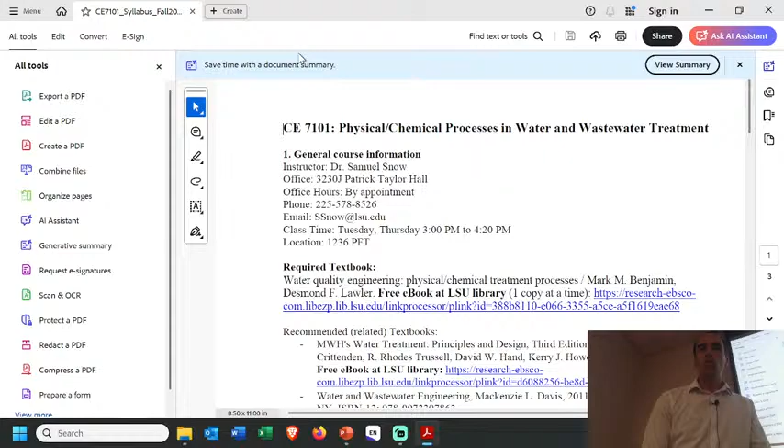So with all of that, it's kind of too much to cover in one semester, I've found. So we're going to focus in, of course, on reactors and reactions, and then, well, let me just go ahead and pull up the syllabus. We'll show you. Since our department also teaches something that focuses a little more on the chemistry side of things, I'm going to gear this one a little more towards the physical processes.

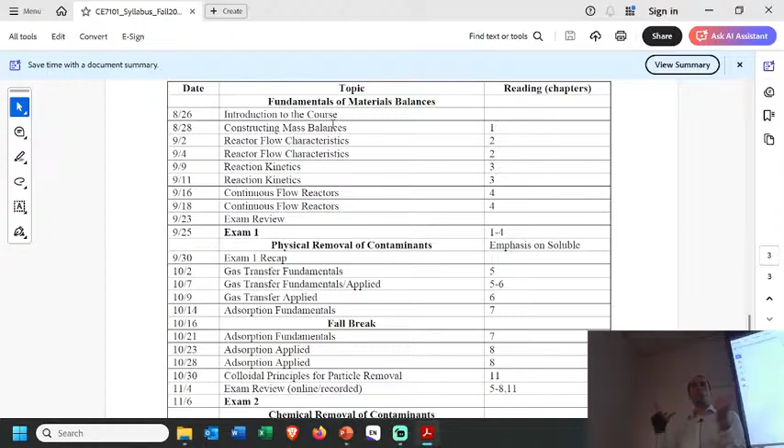Things like adsorption. So you'll see our plan kind of is to go through reactions, reactors, and that'll be our first segment: understanding almost the container that we accomplish some transformation in, and that transformation process itself in terms of how quickly things happen. That's going to be the focus of the first unit of our course.

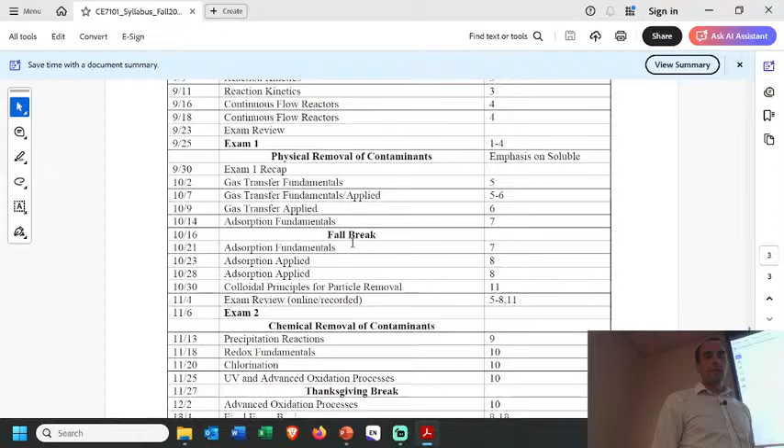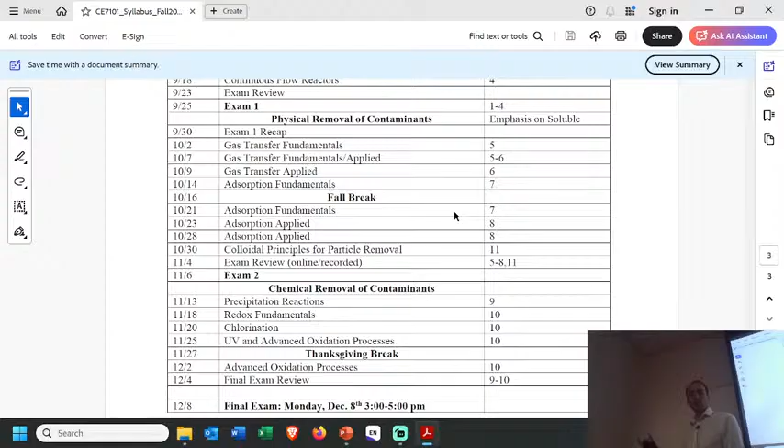From there, we'll talk a little bit about gas transfer, some fundamentals there, and adsorption. Turns out those two are fairly similar concepts in terms of adsorption models often being used for gas phase type of stuff, but adsorption is also used in the liquid phase, and we'll get into a little bit of colloidal principles in terms of colloids adsorbing and surface chemistry with that. The last segment then will be on more chemical transformation, chemical removal type of things.

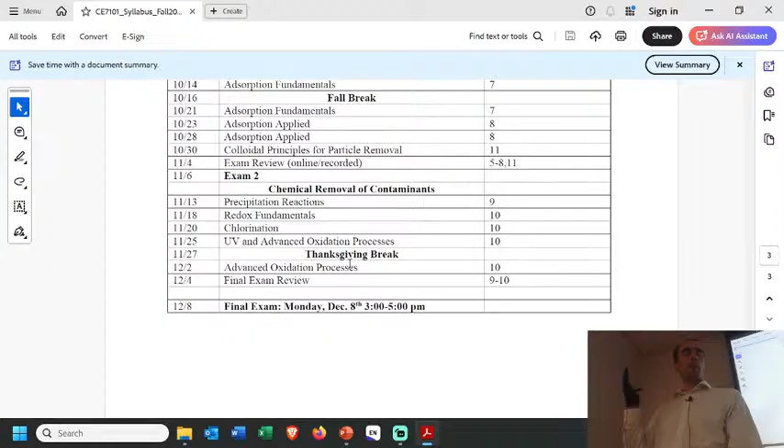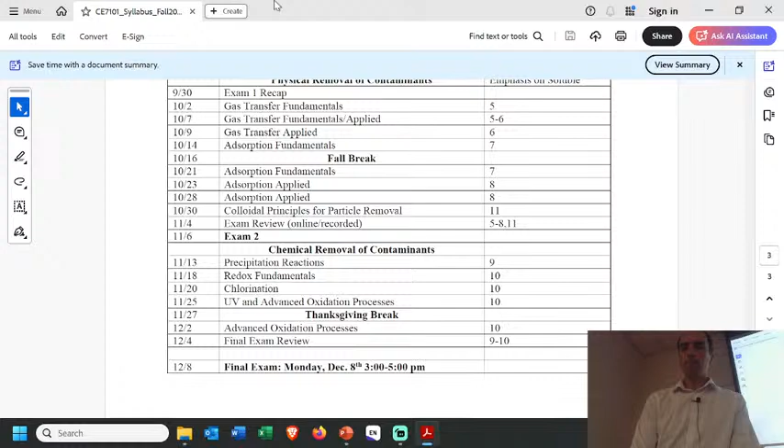So this is my plan right now. If you give me some feedback on the early side, I could shift this. So if somebody really wanted to learn something in particular and felt like you'd really love to have a course on something, you're welcome to speak up, and I'll see what I can do to adapt. So if we take a look back at the slide I had, of course, we're going to do some reactors and reactions.

That puts us in the context of what we're doing. If we say this is a second order reaction, what does that mean? What implications does that have? And what might be the best reactor to put that in, right? There's a lot of things we can consider with that.

So then we're going to take kind of a physical approach to the dissolved, and a chemical approach as well to the dissolved. We're not really going to touch on membrane processes too much. I do have a few lectures on that I could share with you if you're interested.

In the past, we had a 4,000 level special topics course on membranes, and we just hired Dr. Se-Woon Kim, who's also a membrane specialist. So he will probably teach that or something similar pretty soon. So if you did really feel like you needed some membrane stuff, you can let me know. But there's probably going to be some good opportunities for courses dedicated to that. So it's probably not going to touch on that too much, but I'm sure I'll mention it.

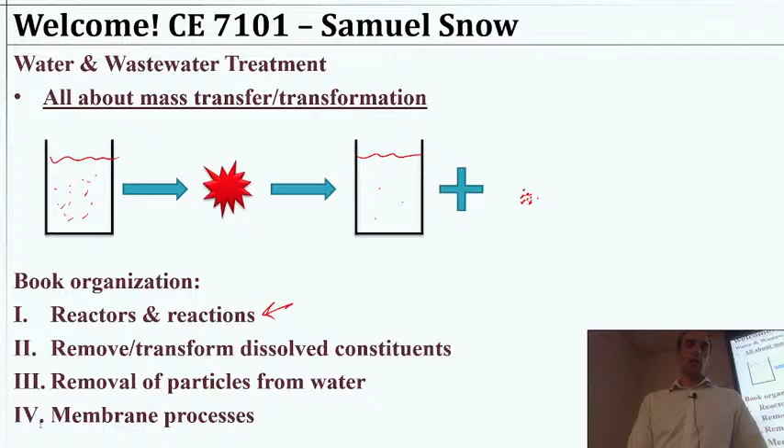I am recommending that you get it, but I'm flexible in terms of, let's see, I'm trying to remember. Can't remember if I've assigned specific problems. I think you probably need it, for I'll give you a problem to say, hey, go solve this problem. So I am asking that you get it. If you're doing anything with water treatment, you're going to be glad to have it, physical or chemical processes. It is a thick book, and I believe there's an online version.

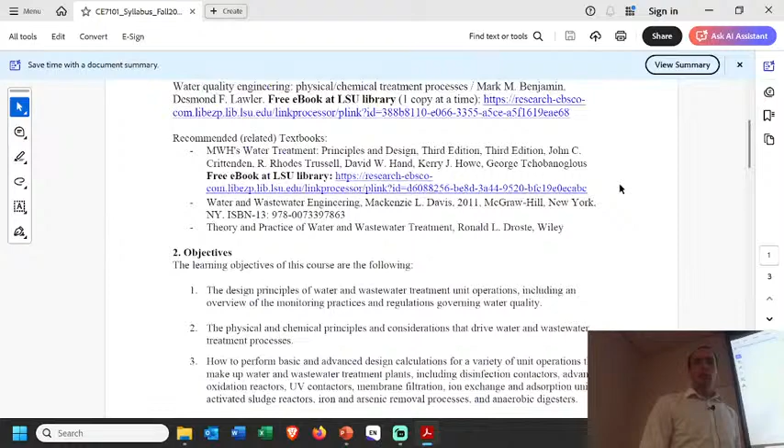In fact, I think if we go back to the syllabus, I think you could even check out one copy at a time maybe, but you can check out the book from the LSU library. So it might make me log in, but if you use this link when you're on LSU's campus, I believe you can get the full text like that. So hopefully it's not a big deal. You might want a physical copy.

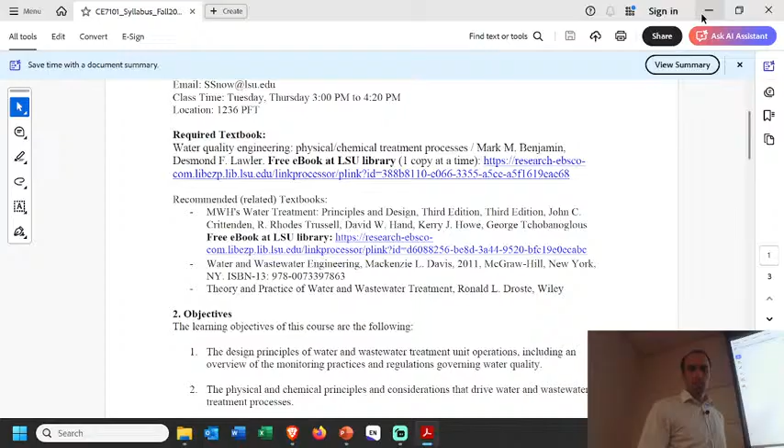So take a look here and figure it out with the library. I don't recall exactly all this, but that at least gives you the information of what book it is and where you can find it. Okay. There are a few other books that you might take a look at.

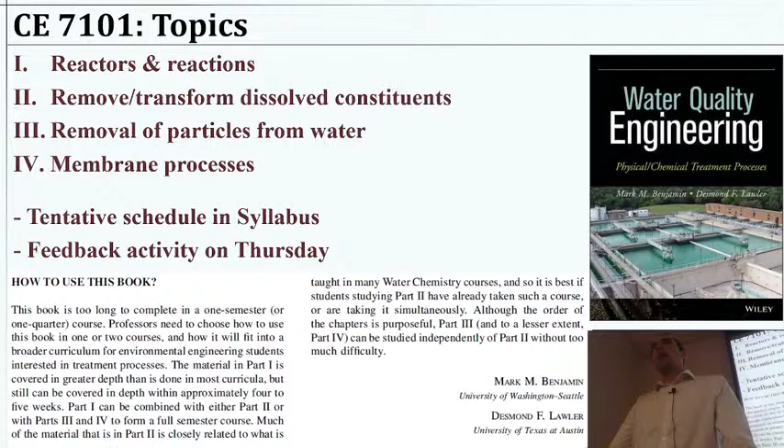Okay, so we have that tentative schedule. I'm probably going to design some sort of a feedback activity for our next class Thursday to kind of get an impression of how you're feeling about the different topics. I didn't prepare that for today, just was keeping it pretty simple, but that'll be something where you can kind of write a few notes like, hey, I'm really uncomfortable with this, would really like to see that, that kind of thing.

All right. The overall structure, assignments and things: my plan is to have two midterm exams and one final. That kind of splits up the course material a bit, with a homework assignment associated with each, kind of on that particular topic. I've also decided to cut the reviews down to just one.

So what I'm going to have you do during the semester, as one other assignment, is to write what I'll call a critical review. And the assignment will essentially be to find a paper, a peer-reviewed journal article, and critique it. This will be a little bit like a journal club activity, but it'll be your own perspective on what's good and bad for this article. Did they really support their claims with the evidence?

So it might be a good idea to find a bad paper, easy to critique, right? But what I'm looking for is for you to use your own study to see, okay, are they just repeating somebody else's work? Did they do something new? Is that new thing actually important, or are they overhyping it? Give a critical eye to it.

Maybe you find a really great paper and it shows because a lot of people are citing it and you can't find anything at all wrong with it. But what you could do is talk about, well, nobody else did this first, and so that's why it's making a big impact. So this will be an assignment to really give a critical review, and we'll talk more about that. I have kind of a rubric for you for that.

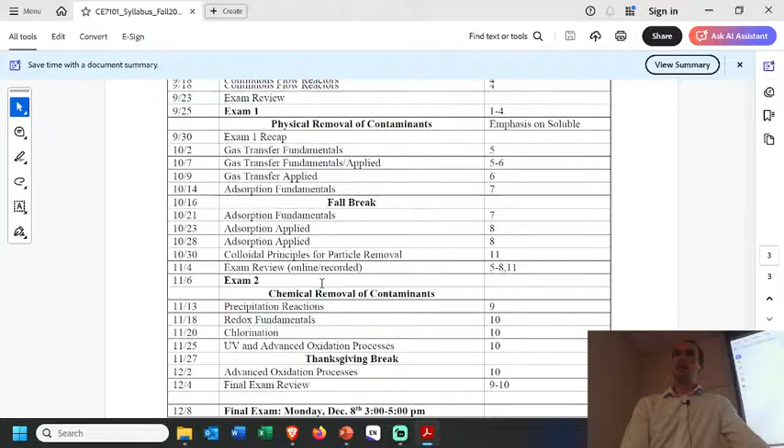Okay. So I think that about covers the syllabus. Any questions on that? Anything you guys feel like you want to see or are scared of? Or I'll get more feedback from you on Thursday. I'll make you write a little bit. What is the exam like? Very hard. No. It should look something like the homework, but scaled.

So the homeworks from this book, by the way, are pretty intense. So sometimes if I don't scale them back well, you probably need the book, and it'll probably go well beyond the course. And I'm going to try to bring the exams back towards more from the course, but that means we're going to be applying what we learned, let's say a mass balance, perhaps to a new mass balance you haven't seen, right? So it will be a little more directly related to the course.

For example, in a homework maybe we'll talk about a particular equation for a tracer test that we just glossed over, mentioned in class, but didn't solve anything with. If we only just mentioned it and it's on one slide somewhere, I didn't even spend more than 30 seconds on it, that's the kind of thing I'm going to aim to not include on the exam, where knowing something important about that is the crux of a problem.

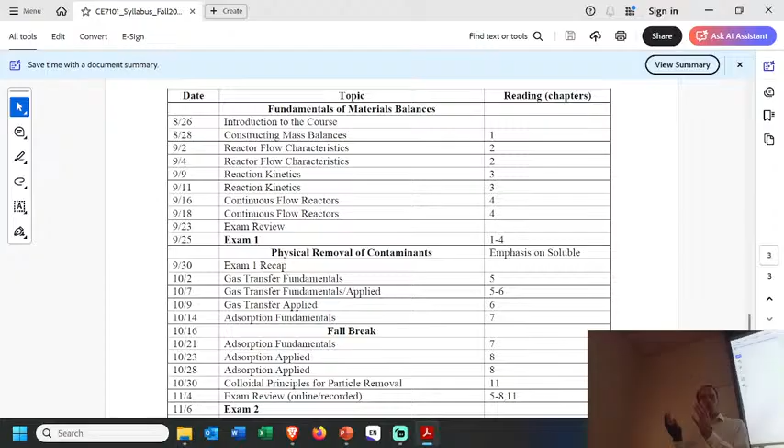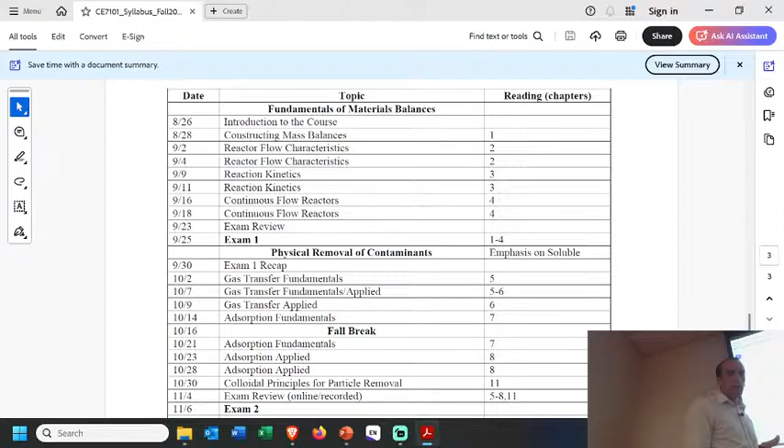Now, there might be cases where I say, okay, well, you could apply this to something else that we only mentioned, but you already have the knowledge for it, right? So you can apply the fundamentals to this other situation. That would be fair game, whereas expecting you to know the fundamentals of some other concept that we didn't really cover wouldn't be. So I'm going to aim to scope it so that it will be a little bit challenging, but certainly manageable based on what you learned from the course.

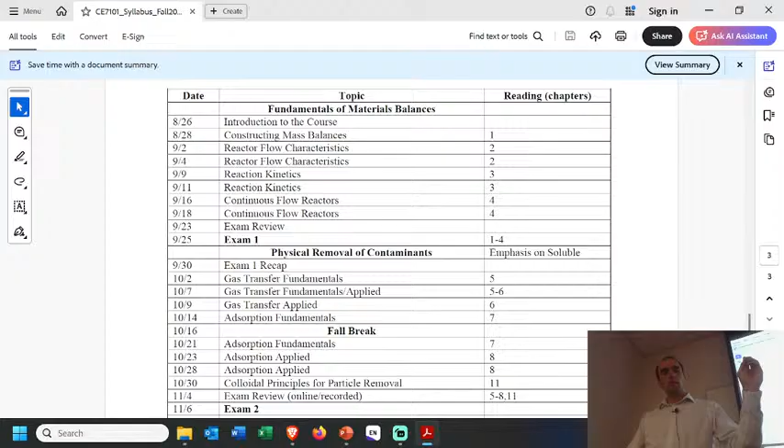That would mean typically maybe a few questions that are a little more topical, maybe true, false, or multiple choice, and then a few where you're solving problems or writing a statement on, okay, how does this work? So I'll better prepare you. I'll use the homeworks as a time to touch base with you to say, okay, what are we still missing? Go through the homework solutions with you as a kind of exam prep. Sound good?

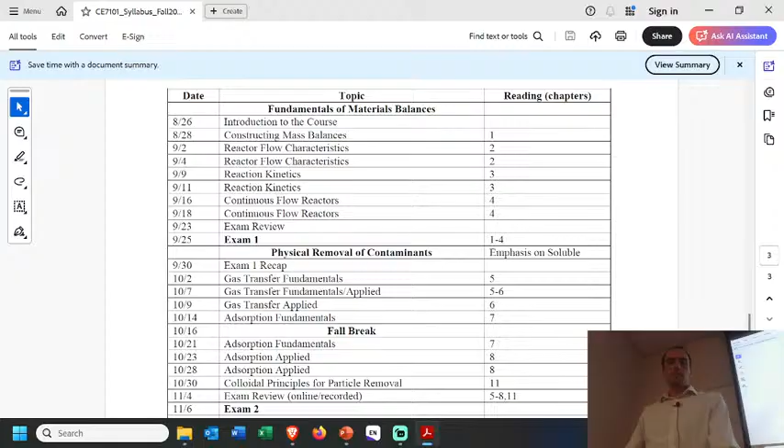All right. Okay, so water treatment. We want to talk about both water and wastewater treatment. And as we do so, the criteria for what we're trying to accomplish depends on the context. For drinking water, of course, there are different standards than for wastewater, right? We could discharge wastewater in a manner where there's not really going to be any human exposure to it anywhere nearby, and maybe it's okay to have some pathogens in it. Maybe we try to reduce it by a certain amount, but we are okay with a certain amount of pathogens.

Now, if I were to ask you, do you think there are any pathogens in here? What would you say? Yeah. Okay, we got a yeah. Anybody? And let's assume, this is a false assumption, but let's assume I cleaned it very well this morning and then filled it up from the water fountain and haven't drank out of it yet. Everything is everywhere. Okay, we got some everything is everywhere. Anybody have more faith in our water treatment? What if this was an unopened water bottle, fresh from Dasani or whatever? Still? Anybody else? Okay, our microbiologists are cutting to the chase here a little bit. Very likely, there are some pathogens in here.

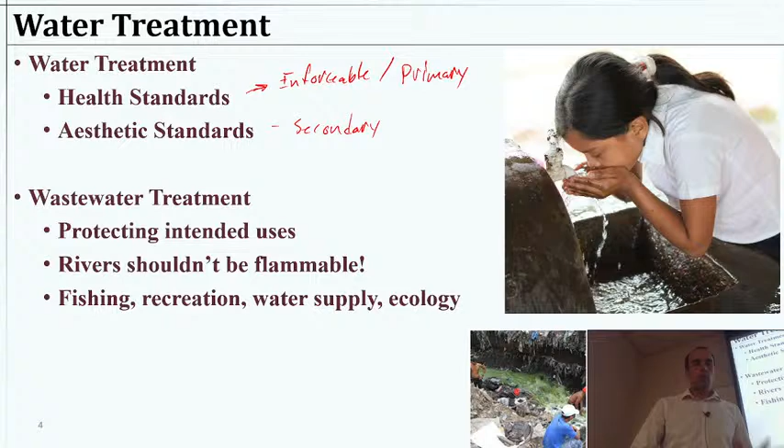It might also be a physical process, or maybe we could use a chemical process. I mean, you could burn the oil, that's a chemical process. So we could do oxidation events that way. But at any rate, where we land in terms of what we're interested in kind of defines what kind of treatment we need. In light of that, we also want to think about, in general, the water cycle.

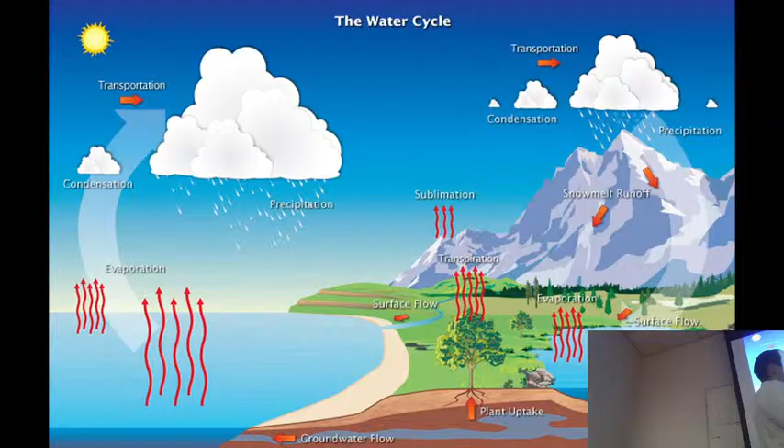It's an important component here just to think about, okay, what water source are we treating or are we discharging to? And how clean do we need to make our discharge or our intake, right, before we are drinking it? So all of that plays into what we're dealing with. This is an example from a long time ago. I think I didn't grab the high resolution version of the picture when I copied this over. But this is a water storage tank in Nicaragua from one of my first trips there a long time ago.

And people had this nice piped water, but they would store it in these bins, and then it's open to the environment, and you can see leaves and things, and we've tested things like that, and it gets pretty dirty. Who knows what animals might be using that to bathe in or to drink from in the middle of the night. So it gets recontaminated, but was otherwise fairly clean drinking water from a groundwater source. So maybe it wouldn't be hard to treat that again, but ideally we'd avoid that altogether.

So this is the kind of stuff, those two are just kind of painting that picture of how do we treat the water, what are we treating it for, and how are we protecting it along the way. All right, so when we think about the human side of the water cycle, we can look at this little figure from a more introductory textbook, and we can look at where we touch it and where we get it from. So we tend to take water for drinking from one of three places.

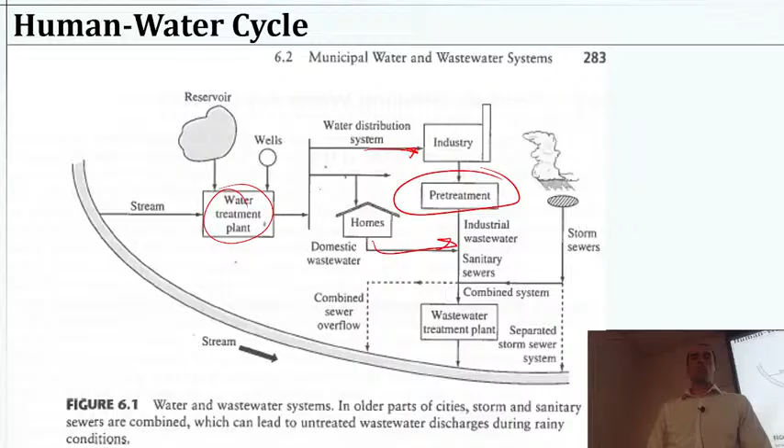Okay. At any rate, then we discharge, and depending on where we discharge it, again, that might be a factor in terms of how clean we need to make it, right? Are we on the space station? Maybe we are in a desert and want to repurpose it as much as we can. Maybe we've got the Mississippi River and we don't even need to dechlorinate because the Mississippi River doesn't care. And that's just the way it is. So all that depends.

Okay, one thing to highlight water and wastewater treatment: if we take a look at the rate of typhoid fever and the death rate from it, I think this is in the US. According to the CDC, we used to have 20 plus deaths per 100,000 people every year from typhoid fever, and we began chlorinating our drinking water sometime around 1910. So this correlates really well with that. This is not strictly the only thing, but our wastewater treatment was also improving.

Our health systems, healthcare in general, was also improving. So the combination of all these things certainly brought typhoid to basically no deaths anymore. Now, the reason I'm highlighting this is because you probably have heard of typhoid fever, but it is a waterborne disease largely. It is food or waterborne.

It is a fecal-oral route of transmission, meaning if you get typhoid, you've ingested something's excrement that had typhoid bacteria, right? So Salmonella typhi, right? So all this to say, this is a great protective mechanism to have appropriate water and wastewater treatment.

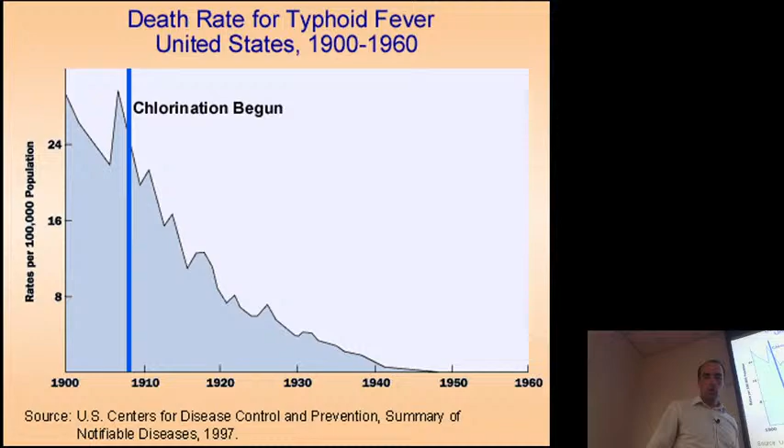Okay, I mentioned hardness earlier. So again, just sticking with kind of the big picture, why we care about this stuff in the class. If you take a look at this map, what we're looking at is how hard is the water, how much mineral content. This is largely going to be calcium and magnesium ions. So depending on where you visited, where you grew up, and a lot of you may be from some other countries, some other places, it varies, right? The geology itself, the mineral content in the ground, that's going to be what dictates the hardness of your water.

So I grew up in this area over here, a little north of Atlanta, and now I'm experiencing water here. I've also lived briefly up here in Michigan, and you can kind of see, all right, there's some big differences there. When I was in Michigan, it was definitely harder water. And certain places in Louisiana, we do end up with hard water, but a lot of it's rather soft.

So any of you ever notice this? You know what I'm talking about when I say the soap acts differently? Any of you have no clue, never experienced?

Some of you just ready for the day to be done?

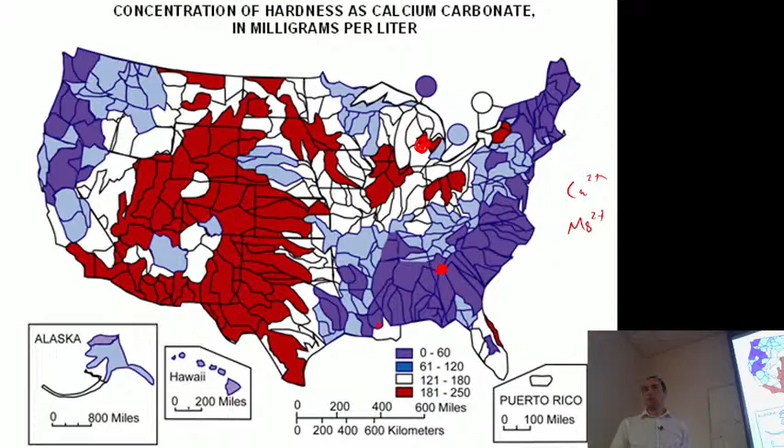Okay, so you might notice it as we go. We spend a fair bit of the time. I taught last year a course with the chemistry side of stuff. So if you're interested in softening and some of that, we'll probably talk a little bit about it in this course, but I have other materials if you are specifically interested. But again, just to show where we're getting our water can tell us how we need to treat it. Our class itself is going to focus on, okay, given some situation, how do we treat it? What do we need? But a lot of these things, it'll depend on the inputs that we have.

Okay, so last thing I want to kind of touch on is a big picture look at a typical drinking water treatment plant. And I'm doing this so that we can kind of get a sense for the different processes we'll be taking a look at. And we'll find specifically the physical and chemical processes in many of these in the drinking water treatment. A lot of these could be used in wastewater as well, like we will do sedimentation. We'll typically call that the clarifier, but it's physically pretty much the same process.

So in a typical surface water treatment plant, again, this will be different if we have a groundwater system, we would have some very, very basic physical barriers to remove any basketballs floating in the water, any fish that might try to swim in, whatever, so like a bar rack screen type of thing. Then we would probably also have what we might call a grit chamber, get rid of any sand and heavy but small particles that could really damage the pumps and things within the system, something that can be removed rather rapidly. Then send us into primary sedimentation.

Now that's going to allow any large particles that were still suspended but could easily fall out of solution to do so, right? That will let some things be removed, and we're going to take that into some sludge processing. There's a good chance this will go into some kind of dewatering, producing some wastewater, and some solids that we could landfill, something like that. So that would be primary sedimentation. And we do that because we want to use gravity. It's very convenient, very cheap. We just need some space to let it settle.

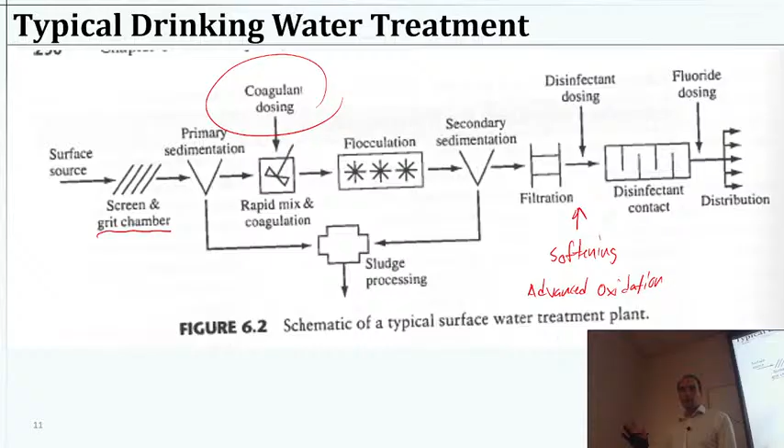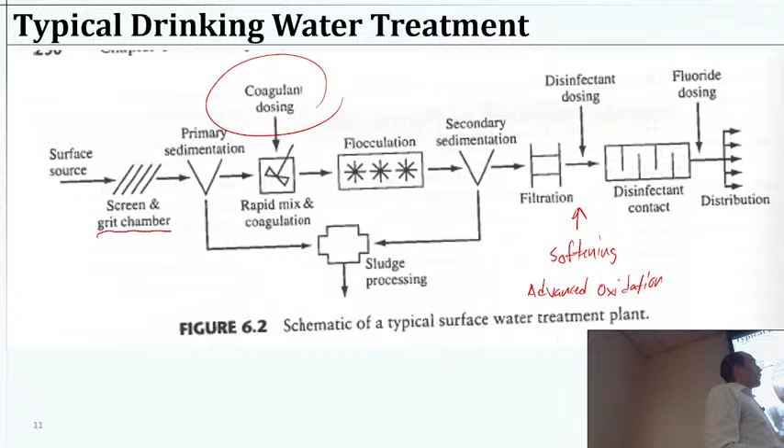Okay, so that's kind of the scheme. From there, we would go into distribution systems, and we generally manage that as if it were a part of the treatment process. So that would be typical for a drinking water treatment plant. And we might, okay, I do have the wastewater. So you see there's lots of physical processes there.

For a wastewater treatment plant, this would be a typical municipal plant with primary and secondary treatment. We do have some biology happening. Again, we're not really focusing on that in this course, but one thing that would be relevant that we probably will talk about is how are we doing the aeration there? How are we adding bubbles in a way where it's going to oxygenate that system properly for our procedure?

So you'll see, again, we have sedimentation, and a clarifier is typically what we would call this. Then we'd have our bioreactor. This is something to allow the biology to munch on all the dissolved stuff and transform it from dissolved molecules into particulate cells. So now we have cells that we can physically remove better. Then we'll sediment those, capture them, do some fancy recycling stuff to keep the microbes happy, and process whatever other sludge we are wasting.

From there, we would probably disinfect and discharge. So we might have some dechlorination if we're using chlorine. So at the tail here, a lot of times we add something like thiosulfate or some reduced sulfur form. Takes a lot of electrons to convert it to sulfate. And so you don't need a whole lot of reduced sulfur to get rid of all your chlorine that's going to oxidize it. So maybe we dechlorinate here.

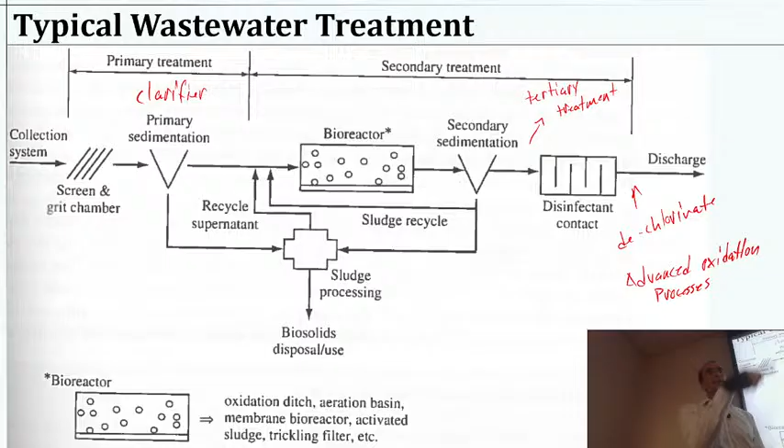And as soon as they start coming through a little bit, you're going to know that you have to take that one offline, go replenish or replace the activated carbon, and you can actually typically switch so that now the one that was in the second place is now in first place, and you're sending through the new one as the backup. That all happens quite routinely because we have a lot of these underground storage tanks. So if we're pumping up groundwater and treating it for that, that's pretty standard. And that would be technically a wastewater cleanup, I guess, but it falls nowhere in this picture, right?

So there are many processes that we might have for water or wastewater treatment that aren't necessarily tied exactly to these 2 systems. Maybe we do something to remove ammonia, and that could be some industry and not associated with a wastewater plant, right? So like ammonia stripping or something like that. So we will talk about some things that are not necessarily typical in a plant like this, but here's a good overview of the typical design.

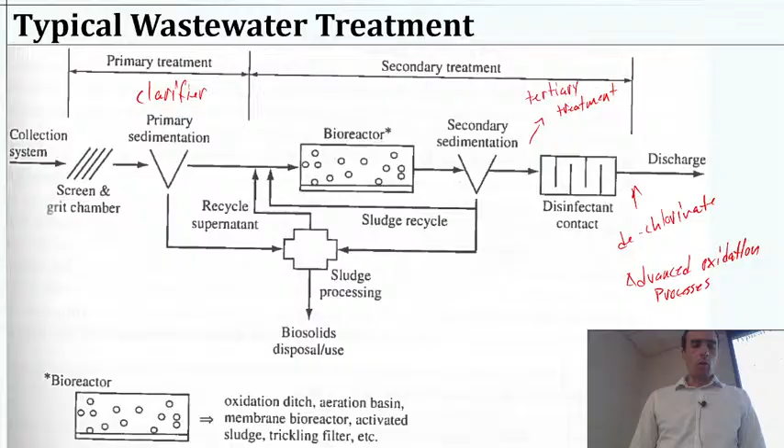Okay, let's take a quick look at Moodle, the page I've got set up so far, before I let you go, but I am keeping it a little simple today, in part because my own voice is going to need it. I teach another course, essentially the undergrad version of water and wastewater treatment in general, so we do cover some biological topics there, at noon on Tuesday, Thursday. So for you guys, I apologize if my voice ends up a little shot. Today, keeping both a little simple, so hopefully it's all right.